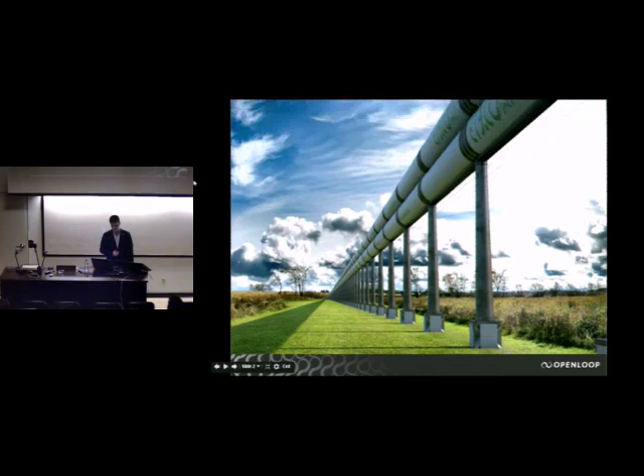Imagine a world where you can travel from across the province, from Cornwall to St. John's, in about half an hour or so, a world where you have tubes side by side, potentially by the dozen, stretching from horizon to horizon, with pods effortlessly flowing through them at almost the speed of sound and perhaps beyond. Now, this sounds really like a world of science fiction.

I mean, to travel in a tube sort of conjures up images of Futurama or Jetsons, where people traveled through pneumatic tubes. And of course, up until now, this has been a world of science fiction, a world of the impossible.

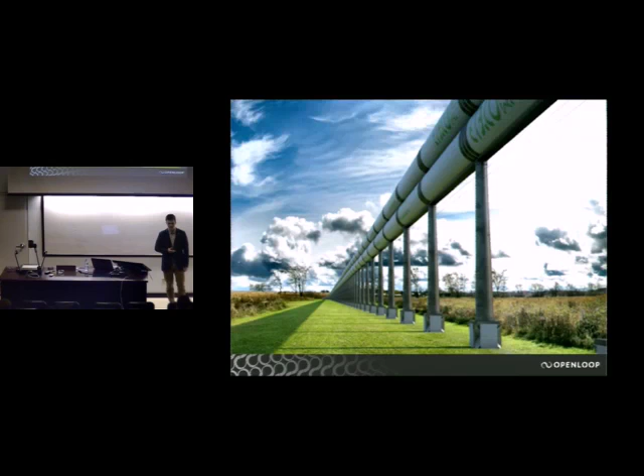One man thought of this world, and he also thought it was science fiction, but then he decided that imagination and science fiction simply wasn't a suitable label for this idea and this world. That man was named Elon Musk.

Elon Musk was born in a South African city called Pretoria on June 28, 1971. His mother was Maye Haldeman, who was a model from Saskatchewan, and his father was an electromechanical engineer who was raised in South Africa. As a child, Elon could always be found with his head buried in books, devouring information at an incredible rate.

He was a gifted child, and he was always curious and always imaginative. At the age of 12, he actually designed his own video game called Blastar. If you go searching online, you can actually find it. People have recreated Elon's game, and it's sort of a weird game.

You have to destroy some sort of enemy with a status beam, which really no one knows what that is to this day. But anyways, that's not too bad for a 12-year-old.

As he aged, Elon kept his imagination, he kept his creativity, and the dreams that a child would normally have did not die as he aged, but rather they reached actualization. They reached realization. They became reality.

Many people consider Elon Musk to be a real-life Tony Stark. He's a billionaire who's always constantly on the fringes of human technology, trying to extend what it is that people are capable of doing. Elon's grandfather, Joshua Norman Haldeman, explored Africa with his plane, and you can sort of guess that maybe Elon got his explorative nature from his grandfather.

While Elon doesn't want to explore Africa with a plane, he actually has his eyes set on something much bigger: the exploration of our solar system and the colonization of other worlds. The ultimate goal, the thing that's driving him, is the preservation of the human species.

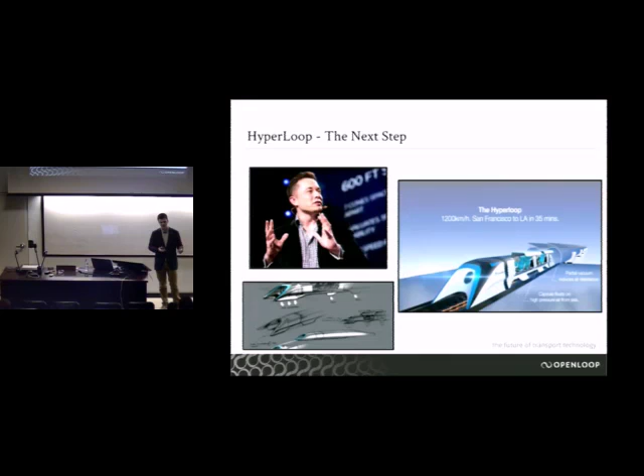This is the technology that Elon has created, and he's given it to the world, and it's up to the world to develop it and make it a reality. So we actually have the opportunity to be part of this dream that Elon has.

Now, the technology we see is in its infancy. What we're looking at is the unknown, a completely foreign thing. The world does not have this technology yet—it's beyond the fringes of what we can do. Now, this idea is in the hands of hundreds of thousands of engineers, scientists, and hobbyists all around the world to try and make this technology a reality. It's up to the world to do with it as they please.

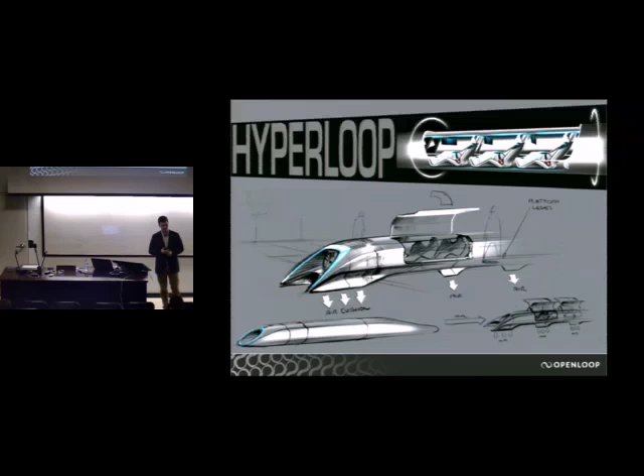Now, this technology is controversial, although many people praise it. There was much opposition to it, but at the same time, people still really like the idea. And it's going to be seen in the coming decades who has their feelings justified, whether the Hyperloop becomes a possible technology, and if it's possible, is it feasible? That's what we're going to find out in the coming years, in the coming decades.

Now, to understand the Hyperloop, we're going to approach it using an analogy, a combination of multiple technologies we're probably all already familiar with. You can dissect the Hyperloop into 3 different parts. The first is an air hockey table—most of us have seen one, I would think. The second part of the analogy is to understand the Hyperloop in terms of a Concorde jet, a supersonic jet plane that was retired, I think, a couple decades ago, but we'll still look at how the Hyperloop incorporates technology from that.

And the third analogy is, of course, looking at how the Hyperloop is similar to a railgun. Now, a railgun is probably less familiar to most people—in fact, it's actually being developed as a new weapon, but we're not interested in the chaotic aspects of the technology. We want to make it a peaceful technology, so we'll look at how the Hyperloop is similar to a railgun. Now, before we look at why you would ever want to design something like an air hockey table, you have to look at the benefits of doing that.

The answer to that question is kind of simple: it's friction. Whenever you're driving your car, the wheels are constantly interacting with the surface upon which the car travels. If you look at the green circles, these are the atoms of the wheel of the vehicle, and the blue circles are the atoms of the surface on which the vehicle travels. When you have a force or weight acting on those atoms, they become intertwined—they interlock with one another.

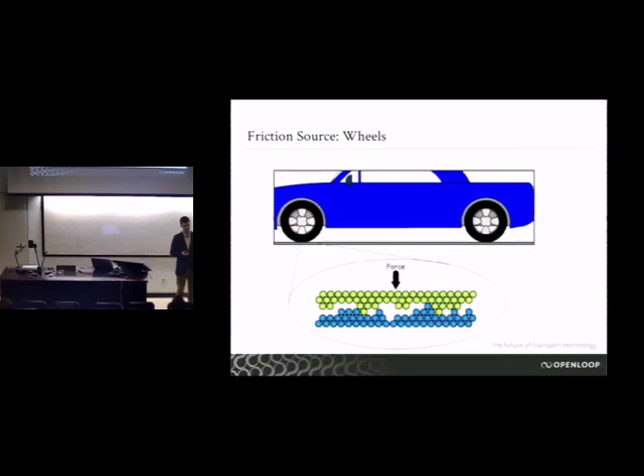It's a lot like if you took 2 layers of Velcro and stuck them together—they're made in such a way that they stick, and if you try to pull them apart, it's kind of difficult. The same thing happens with friction: the atoms intertwine with one another, and it's difficult to take them apart. This is what slows you down. The reason why you don't see me ever so slightly sliding across the room right now is because of friction, because the atoms in my feet are interlocking with the atoms of the floor.

Now, this is why we want to have something similar to air bearings in a technology. It's to minimize the impact of friction. To avoid having friction with the floor or the surface, we need to be suspended from the floor. We need to not contact the floor, and that's how we avoid friction. And this is why we incorporate air bearings.

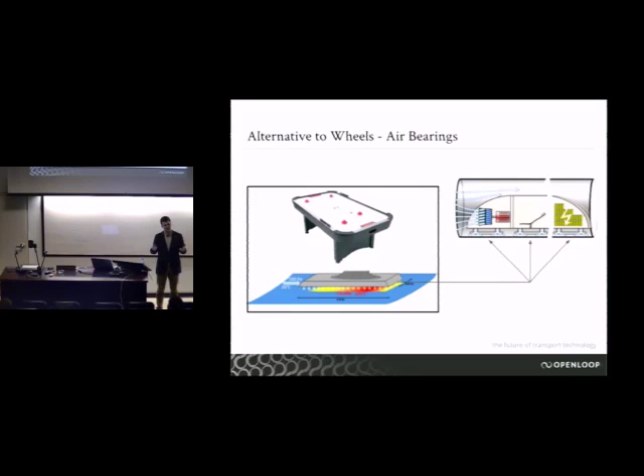The air is pressurized, and so it builds up underneath the pod, and it ultimately lifts the pod upwards. So the air bearings are responsible for creating a pocket of pressurized air underneath the pod that ultimately levitates the vehicle. This is what allows you to not contact the surface, but still be able to move freely.

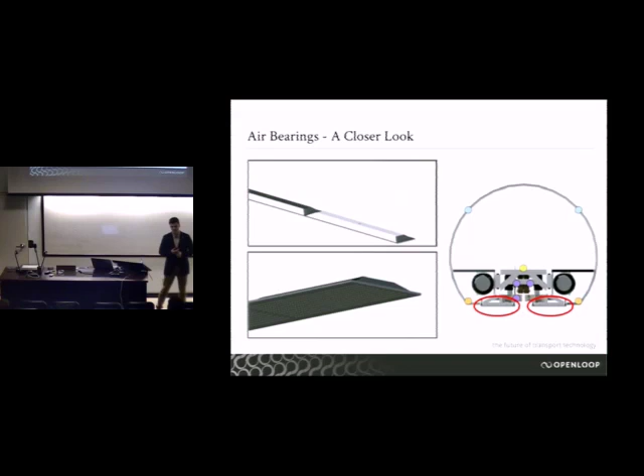Now these here are actually 3D renderings of the skates, or the air bearings, that we're actually developing right now. These are the ones we've designed, and I know that if the students at Northeastern University, which are students on our team, one of the universities we're working with, heard me constantly referring to their air skates as air hockey tables, I'm sure they would be kind of offended. But they're definitely more than just air hockey tables turned upside down.

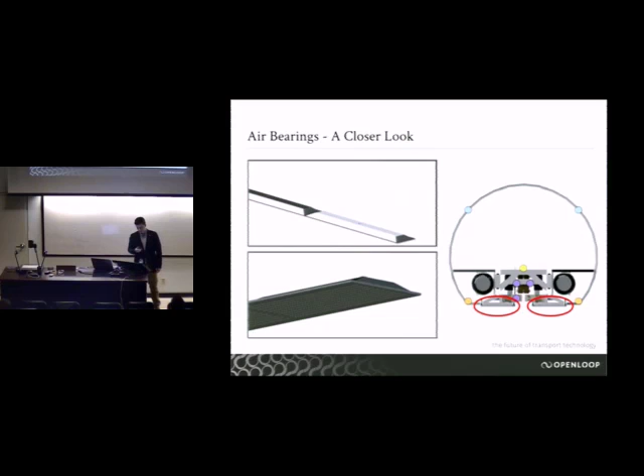Now the picture you see on the right is actually a cross-section of the pod. If you cut it widthwise, this is what you would see. You can see the things circled in red are actually the skates themselves. Those will be underneath the pod, and that's what the air comes out of to lift the pod upwards.

Now you might be wondering, how is it that we can have air that suspends what is potentially thousands of kilograms? We walk through it, and I'm breathing it right now. There's no resistance, not a problem. If you're walking outside, the wind's not too bad, unless you live in St. John's, where the air is incredibly forceful.

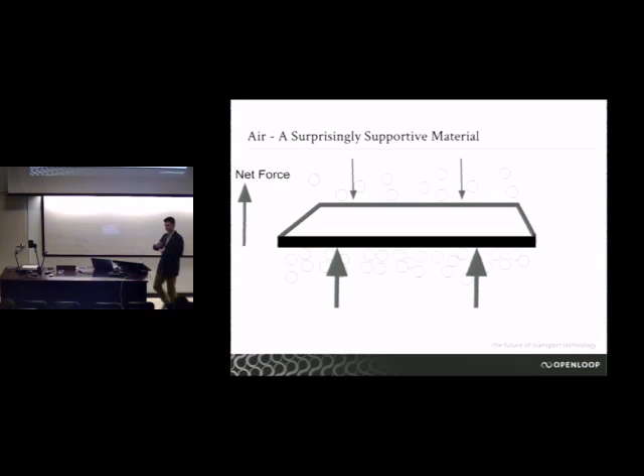What does that mean? Well, each air molecule is constantly colliding with the surface of the pod. If you have more air molecules underneath the pod, you have more air molecules constantly colliding with it. So the reason we can lift thousands of kilograms is because there's more air underneath the pod than on top. Therefore, you have more air molecules hitting it up than hitting it down, and this positive amount of air molecules pushing it upwards leads to a net force upwards, and it suspends the pod.

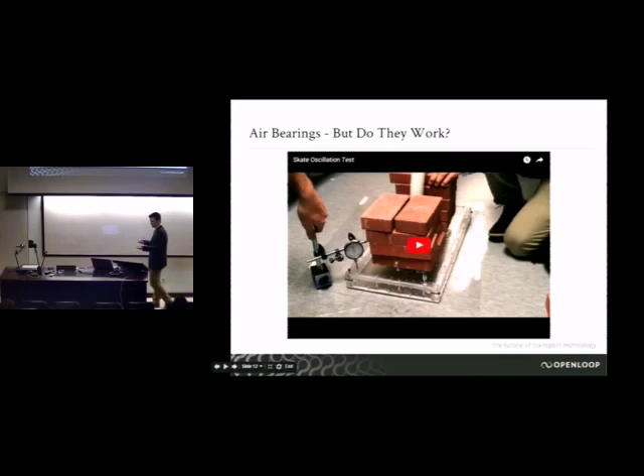And it's all great that we can have a mathematical description for how a Hyperloop can be lifted using air, but are we really sure that it works? Sure, on paper everything sounds fine, but once you put it into application and try to engineer it, it's sort of a different story. But some of the students at Northeastern University, the university responsible for developing the air skates, have evidence that proves otherwise.

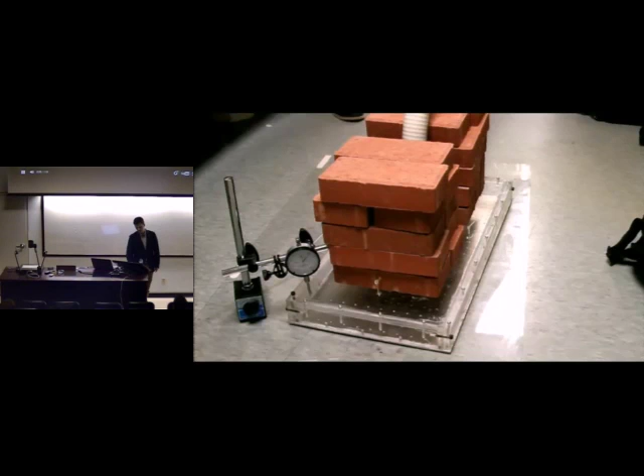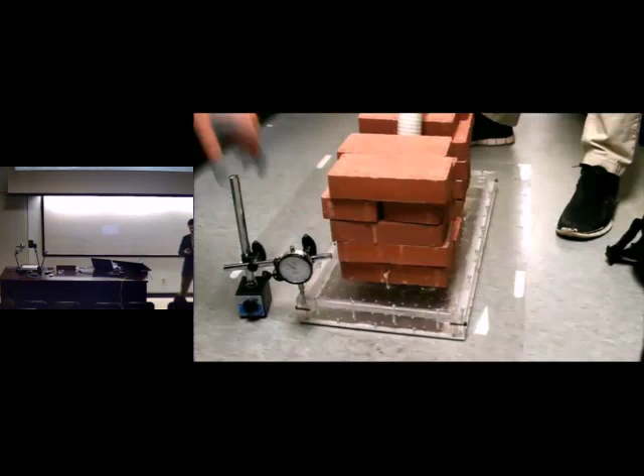The needle you see in the bottom left is actually showing the oscillations of the air skate. This thing is completely suspended, even with all these bricks on top. It's actually completely isolated and does not contact the floor on which it travels. The needle here is measuring how much the pod is moving up and down. It's moving up and down pretty quickly, oscillating with a really high frequency. So we know it works, which is good.

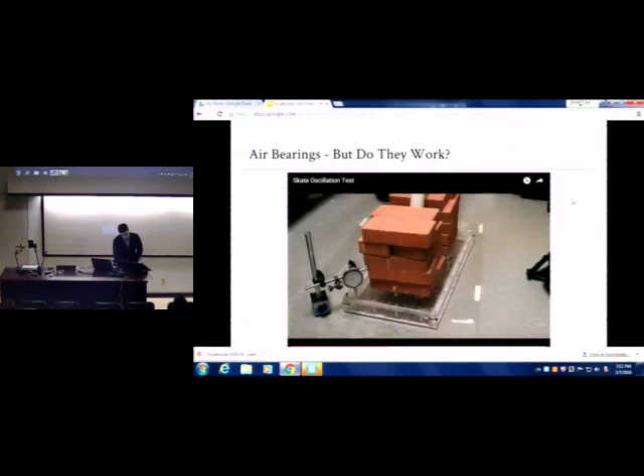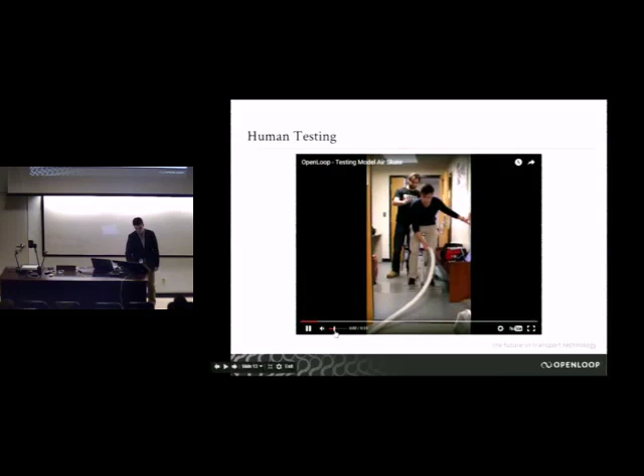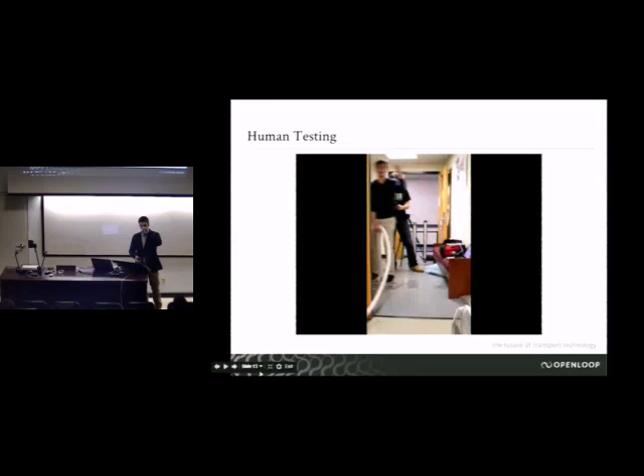So we also did another test as well. It's a little more rigorous and a little more controlled, and we've taken into account the presence of people into the pod. And this is the outcome. So we know it works. Further proof that even if you add people into the equation, it still does work. And Milan is quite happy about that.

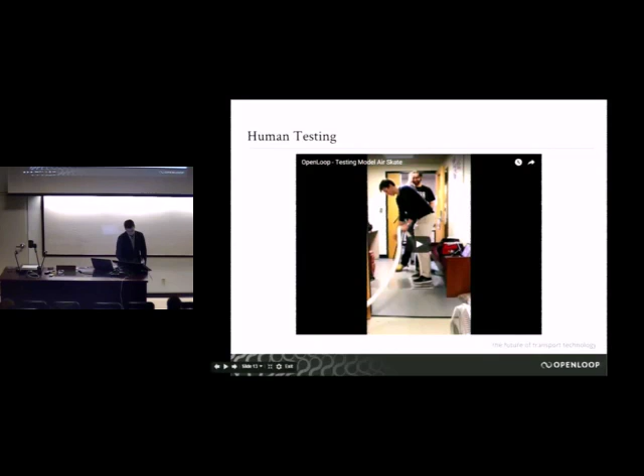So I always think that if this project doesn't work out and the HyperLoop doesn't work, there's always the possibility we can create hoverboards with this technology.

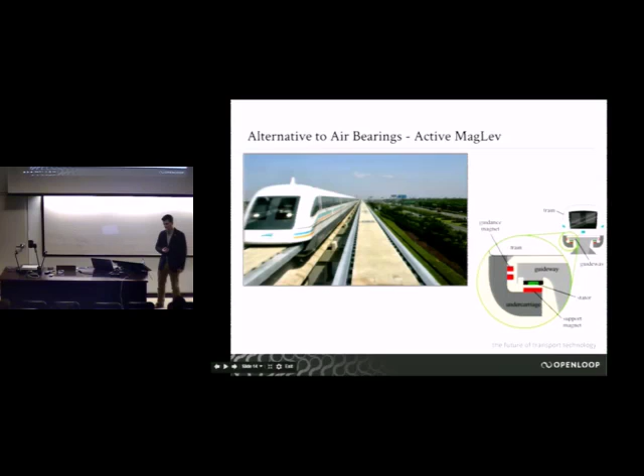So there are alternatives to air bearings as well. Air bearings are an alternative to wheels. There's also another option, that's magnetic levitation. It's no surprise that maglev has found its way into the HyperLoop, considering the fact that magnetic levitation is something we use today. In fact, the train in Shanghai uses magnetic levitation. It's suspended by using opposing magnetic fields, which lifts it upwards in sort of the same way that air bearings lift a pod upwards. We have a force that exerts the vehicle upwards. But there are, of course, disadvantages and advantages to every form of suspension, but this is also one that's also being considered with the HyperLoop.

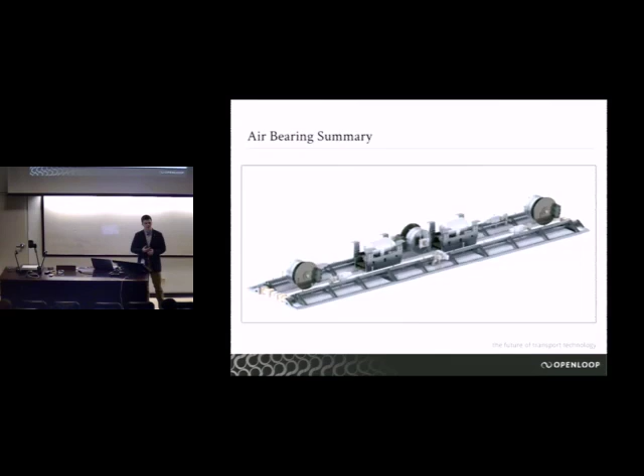Now, as a summary, we've seen that by using air bearings, which are sort of like upside-down air hockey tables, we can suspend what could be thousands of kilograms. So we have these things that the air comes out of. It forms a cushion of air which is pressurized, and it exerts a force on the object, lifting it upwards. And this is how we can maintain no contact with the surface on which we travel and go very, very fast.

Now, this brings us to the next part. The HyperLoop pod requires the usage of pressurized air, but the question is, where do we get this pressurized air from? And this sort of ties into what we're going to talk about now.

Now, the Concorde jet analogy is used for the HyperLoop, and we have to understand why we want to do that, just like how we want to understand why we want to incorporate the idea of an air hockey table into the HyperLoop. Now, there's another problem with friction, and that's the source of aerodynamic drag. If we had all of us now go out to the lobby and compacted ourselves into a nice little group, and someone tried to squeeze through this group, it's really difficult to do because there's so many people in the way. But if you space them out evenly, you can very easily navigate through the group.

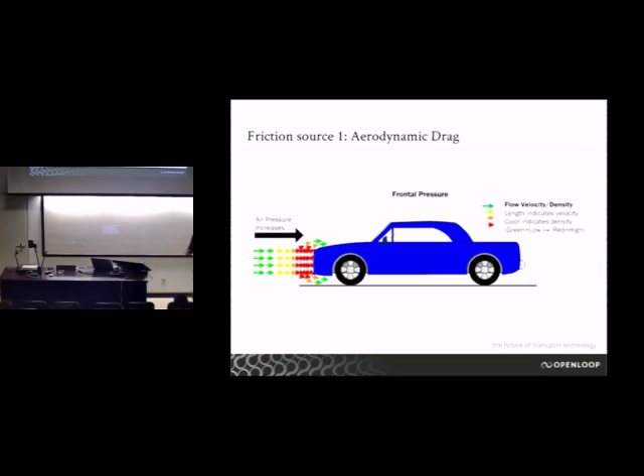This same principle applies to air. If you have air of high pressure, or a lot of air molecules in one space, it's difficult to push past it. If you have less air molecules, it's easy to push past it. This is what we can see here: the air in front of the vehicle is impeding its motion if there's a lot in front of it. Now, another aspect of aerodynamic drag is if we try to take that same sparse crowd spread out, and we try to run really fast through it, it still becomes difficult because now we have to make sure that we're really agile and not hitting anybody. So there are two main things affecting aerodynamic drag: how much air is in front of you and how fast you're going.

So how do we fix this problem? How do we overcome aerodynamic drag? Well, the solution is obvious: you remove the air. But if you do that, if you remove all the air from the world, you don't really have much of a world to live in. So to counter that, we have to create our own little world, and that's a tube. The tube is basically, you take all the air out of it, and you try to take out as much as possible. You might be thinking, though, why not just take all the air out?

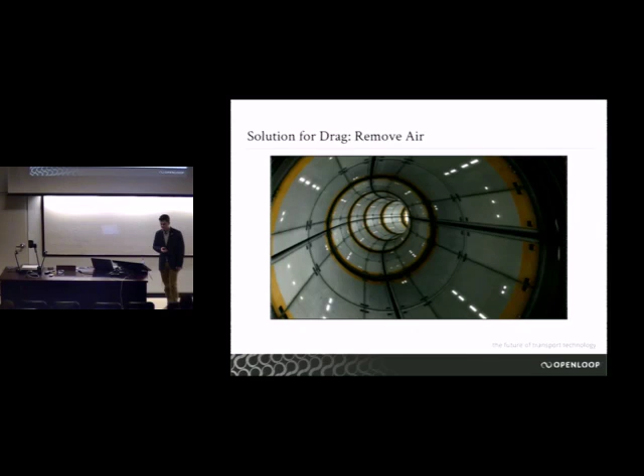But there's a problem with that as well. There's cost. If you have something that's 500 kilometers long, it's inevitable that you have leaks in there, so the air is going to find a way in anyways. So we sort of have to accept the fact that we can't have a perfect vacuum, or else we'd have to have a lot of air pumps constantly pumping out air. So we just try and get a near vacuum instead. This tube has not quite a vacuum, but close to it.

But again, there's still other problems. Even if we've taken as much air as we can out of the tube, there's still one significant problem, and it's called the Kantrowitz limit. It basically states that as you move exceedingly fast, there is a point at which the fluid is acting on you so heavily that you have to exert a lot of energy to try and get past it. You can imagine that with a syringe.

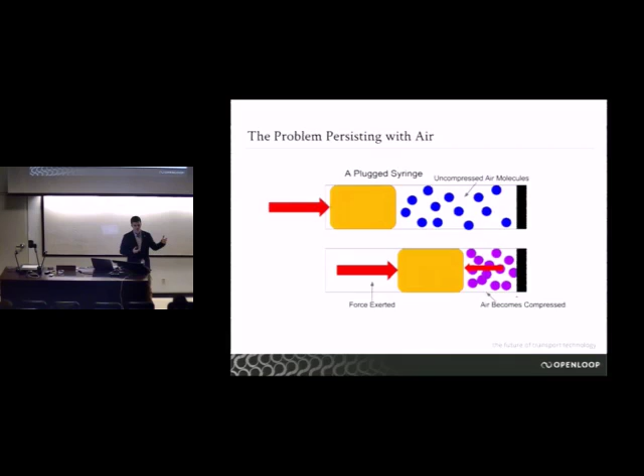If you took a syringe, plugged one end, and pushed the stopper in, at first it's really easy, but as you continue to do so, the air becomes more and more compressed, therefore more and more pressure, and this exerts an even stronger force. Eventually it becomes almost impossible to push it anymore.

Same thing applies to the Hyperloop. The faster you go, you'll eventually hit a brick wall where you can't move any faster without having to put in a lot of energy. And this is how we solve this problem: an axial compressor. If you've ever looked underneath a jet plane before and seen this exotic looking thing that's not quite a propeller, you're looking at basically a jet engine with an axial compressor.

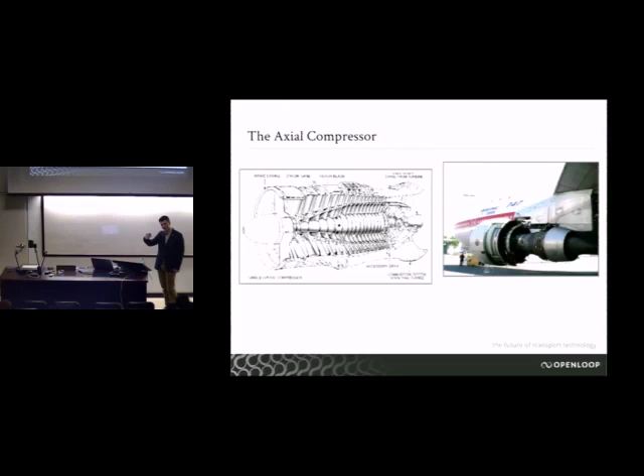Now, the axial compressor isn't the whole thing. If you look at the picture on the right, the thing on the left is actually an axial compressor. The thing on the right is the chamber where we burn fuel for thrust. So all jet planes really are just rockets, but shaped in a different way. The job of the axial compressor is to take the air in front of the plane, compress it, and then use it to inject into the fuel to burn it. The reason why people do that is so you can have more fuel efficiency and burn more fuel. But with the Hyperloop, we are not burning fuel.

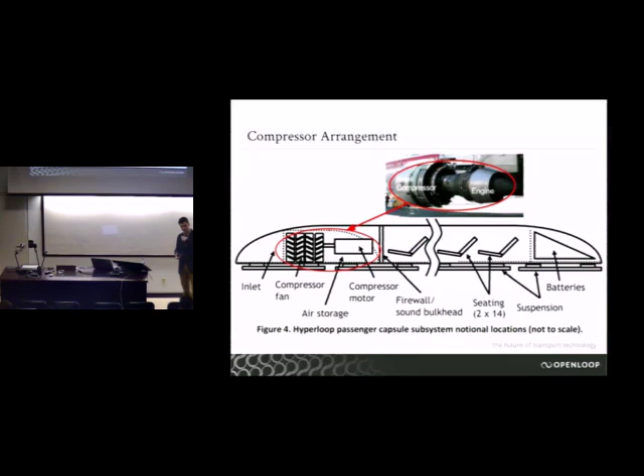In fact, we have a different application for an axial compressor. And that's to take the air in front of the pod that we've just been talking about, remove it from the front, compress it so that we can manage it, and then push it out the back. That's how we overcome the Kantrowitz limit. Now, it also turns out we can use that pressurized air to supply to the suspension, to the air bearings. So we're killing 3 birds with one piece of turbo machinery: removing the Kantrowitz limit and the problems associated with it, adding thrust to the back by taking the air from the front and pushing it out the back, and also supplying air to the air bearings for suspension. So 3 things just by incorporating this piece of technology.

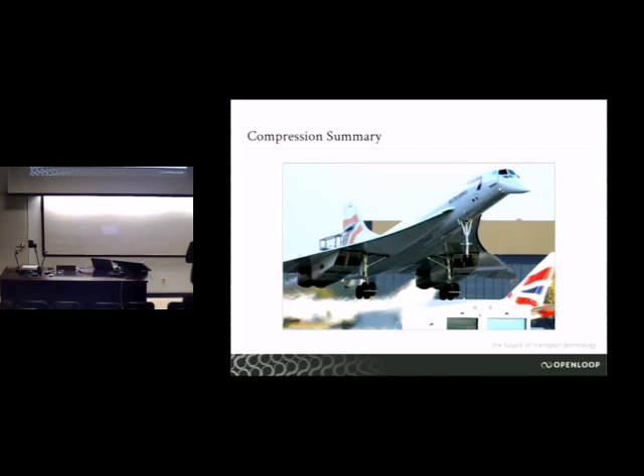So we've seen that by adding in this idea of turbo machinery that's used in airplanes, we can overcome the Kantrowitz limit. We can supply pressurized air to the air bearings so we can float. And we can also push air to the back and use it for thrust.

So the way that it works basically is that you have a projectile, which is what it's used for in this application for weapons. Basically, you have a projectile that is propelled magnetically, in a lot of the same way that if you took 2 bar magnets' north poles and put them together, they repel. We know that from experience. Now, the railgun is used in very much the same way. You have a really, really strong magnetic field that is opposing another magnetic field, and it causes a projectile to be repelled out through a barrel.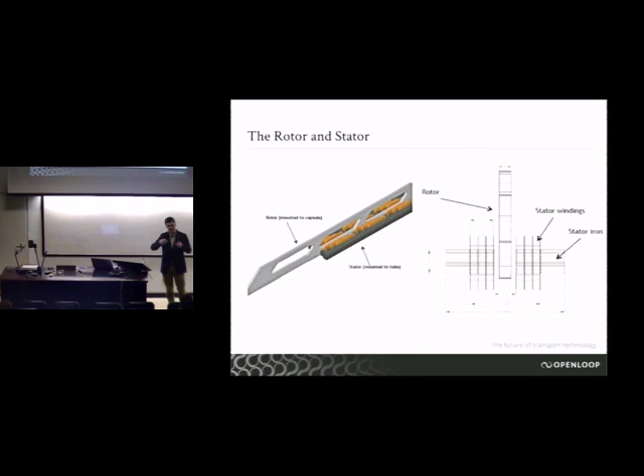That's magnetic field number 1. And we use this magnetic field to create a second magnetic field in the rotor. So every time you pass through these stators, you have these 2 opposing magnetic fields. This is what repels each other and allows the Hyperloop to be pushed, a lot in the same way that 2 bar magnets repel each other when you take their north poles together.

Now, the energy, of course—the whole HyperLoop is completely solar powered, so we don't have to get energy from burning fossil fuels. We can just put solar panels on top of the surface of the tube. We get all our energy that way. If you live in sunny California, you can get about 61 megawatts on average, and the HyperLoop only requires 21 megawatts on average, so that's pretty good.

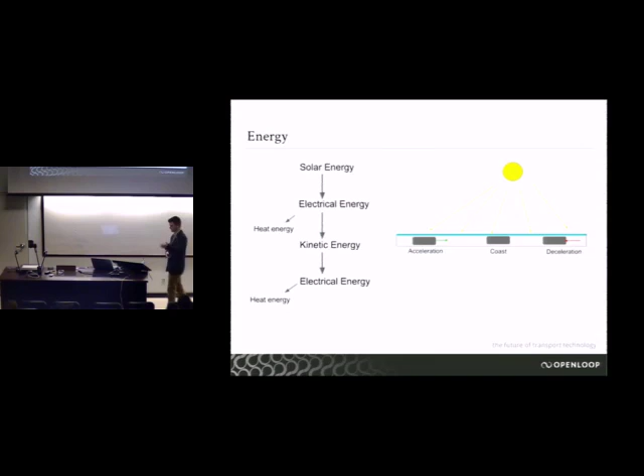Now, when we're accelerating the pod, we're using those stators and rotors, and we're using the solar energy converted to electrical energy to create the magnetic fields. Then, by accelerating the pod, we're creating kinetic energy, which converts back into electrical energy when we decelerate, so we get some of the energy back that we put into the pod initially.

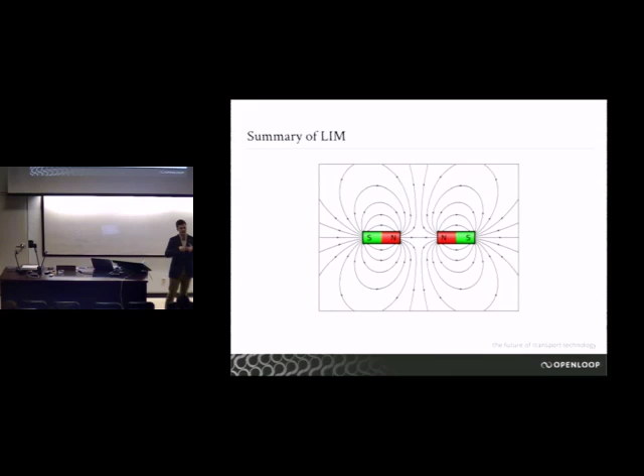Now, as we've seen, take two bar magnets, put them together north poles, and they repel. In the HyperLoop, we're replicating that with the rotor and the stator, and these ultimately repel each other. So without going into too much detail, that's fundamentally how it works.

As a summary, we've seen that we've combined multiple forms of technology, drawing on multiple ideas—the idea of an upside-down air hockey table, a railgun, or a Concorde supersonic jet. We combine it all together and we've got this interesting idea, which right now is just an idea. The design's been put forward, and the world now has access to it.

We can do with it as we want. It's up to us to do with it as we please—whether to make this technology a reality, or to simply keep it in the books of science fiction, or keep it as an idea and some blueprint gathering dust somewhere.

But maybe if we work hard enough, it will rise like other technologies did, like the airplane or the car before that. Maybe we'll revolutionize the way the world is connected just like those technologies do. Or maybe not—maybe it will stay a thing of science fiction. That's what we have to find out in the coming years, the coming decades.

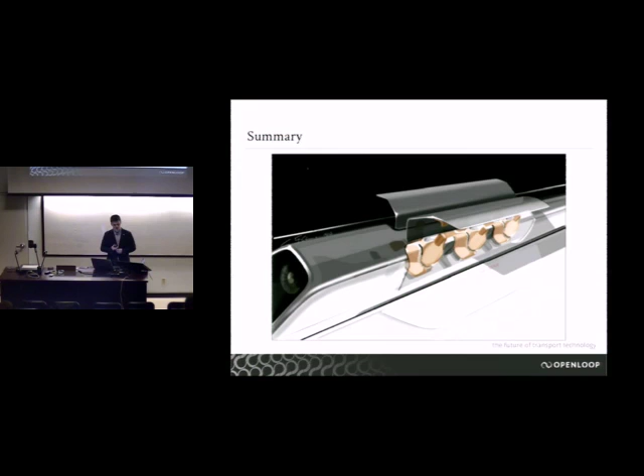But maybe it's not so far to reach. Maybe the future isn't so unattainable, that science fiction isn't so fictitious. Well, we at OpenLoop had the same thought, and I hope by the end of this night, you all will too.

And this brings us to today, to the HyperLoop pod competition that SpaceX is hosting right now, ongoing for the past 9 months. Ever since July of 2015, hundreds, or thousands of students really, hundreds of teams—700 teams—signed up and answered the call that Elon Musk put forward to the world, asking people to take this idea and turn it not just into another idea, but a reality, something we can use every single day.

Now, we at OpenLoop are, like I said, a single group of those explorers, of all the explorers in the world, and we're looking to make this technology a reality. We're looking to contribute an incremental step in the process of innovation, to perhaps give the world a means to begin developing this technology. That's ultimately our job, and that's ultimately our dream. Now I would like to show you exactly what OpenLoop is.

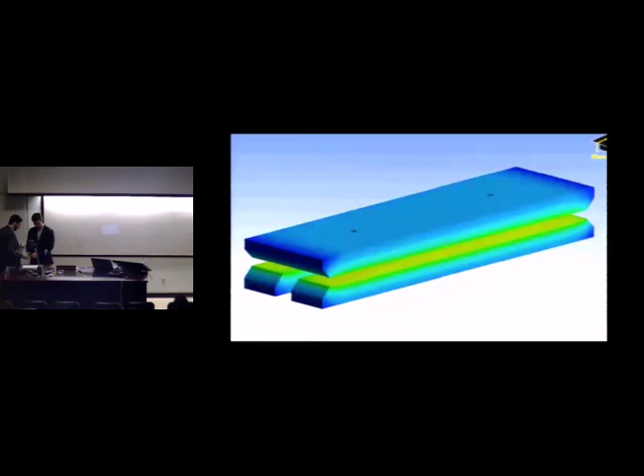Six universities, 2 countries, 1 mission: make the HyperLoop concept a reality. More than 100 students from countless academic specialties have come together to fulfill this common goal. Months of work have resulted in a robust pod design, focused on scalability and advancing the HyperLoop technology as a whole. As we enter the final phase of this competition, the time has come to build our pod. Join us. Do you feel the vibes?

So you're probably wondering at this point, what does MUN have to do with all of this? But MUN is not the only team part of OpenLoop. OpenLoop is kind of an interesting team—we're one of only a couple out of the 700 that decided to go this route.

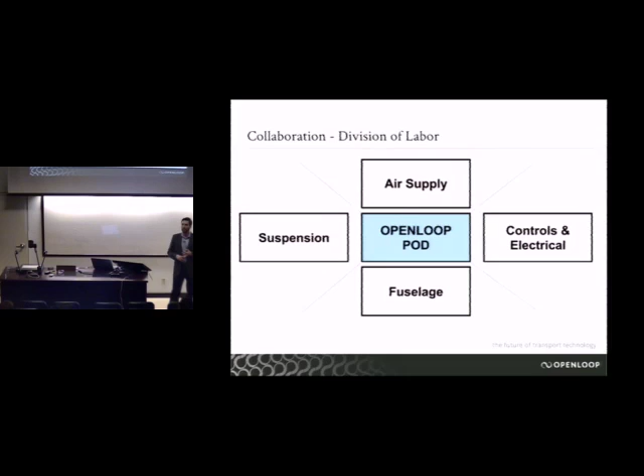This team now has split up the roles. Taking on a problem that has such a diverse background and so much technical work needs to be split up so that it's manageable. So our team basically split this into 4 main areas: air supply, which MUN is responsible for; the suspension, which Cornell and Northeastern take care of; our controls, which is Harvey Mudd; and our fuselage, taken care of by Michigan.

To date, we started in about July looking at this concept. Since then, there's been a lot of demanding deadlines. At this point in the project, we've actually done a final design and are optimizing that design and preparing to start building, testing, and procuring materials.

So up until now, we've hit a few targets. First being the preliminary design package, where the 700 teams that originally signed up and said they'd love to be a part of this submitted a top-level design package. Of that 700, I'd say about half of those teams actually made it through.

At that point, we worked even harder to make sure that by January we had a final design package we were confident in, because at that point they selected who would actually be going to Texas to continue forth. So at this point, we had what was now 700 teams reduced to about 125.

And then we traveled to Texas. To be honest, that weekend was probably one of the coolest experiences any of us ever had. We went down there and actually met our team for the first time. At this event, there were media outlets such as Discovery Channel, BuzzFeed, and basically anyone you can imagine. Elon Musk himself actually showed up to the event.

The teams competed. The level of technical detail was amazing. Everything you saw was innovative, creative, and well done. At this event, we basically presented to a number of judges for 2 days and did a formal presentation. It was open to the public for an afternoon, where 4,000 or 5,000 people came to College Station, Texas to check this out.

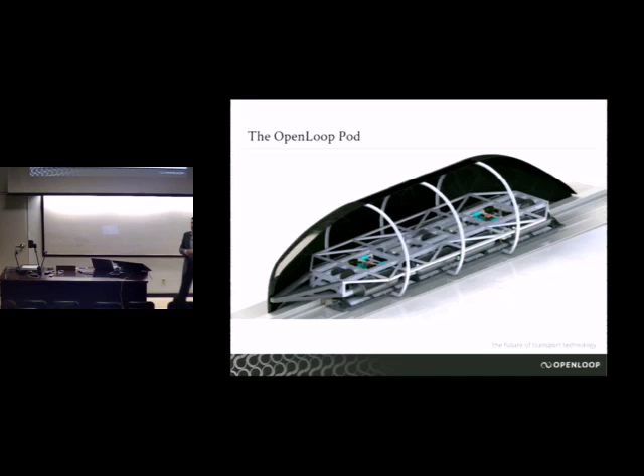So now a little bit about what we've been doing so far. On the screen right now you'll see a half-removed shell of our pod. Inside has the internal frame of our fuselage, our air supply, our skates, and our controls. Inside this system, we also have emergency braking, because when dealing with something that's not known, making sure you can control it and that it's safe is of the utmost importance.

When we look at our pod, everyone thinks this is just a prototype for a competition, something you could have in a room. But to put it in perspective, our pod is approximately 725 kilograms, 19 feet long, and about 4 feet in diameter, a little bit off circle.

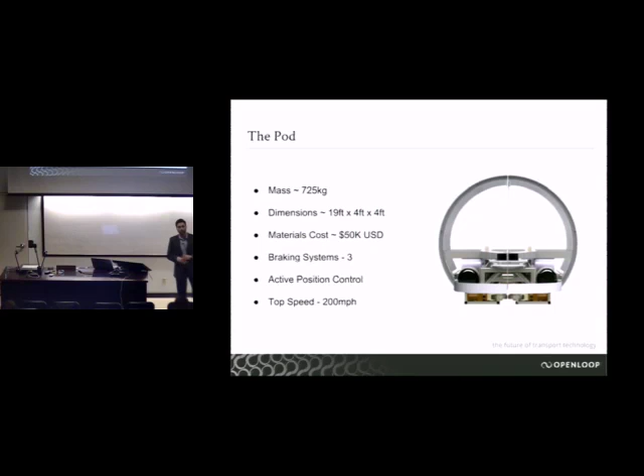When you look at this, our pod is going to cost about $50,000 US just on materials alone. To put it in perspective, some of the teams using maglev range up to $300,000 for these prototypes, which will travel up to speeds of about 200 miles an hour.

The first part of our system is the structure, making sure it's suitable for the rest of the frame to sit on. Our structure is made of 6061 aluminum and has been designed to be super robust, because any load—and ours is designed for a 2,000-pound load inside the pod for cargo, just like Andrew mentioned, since not just people are the intent of these pods.

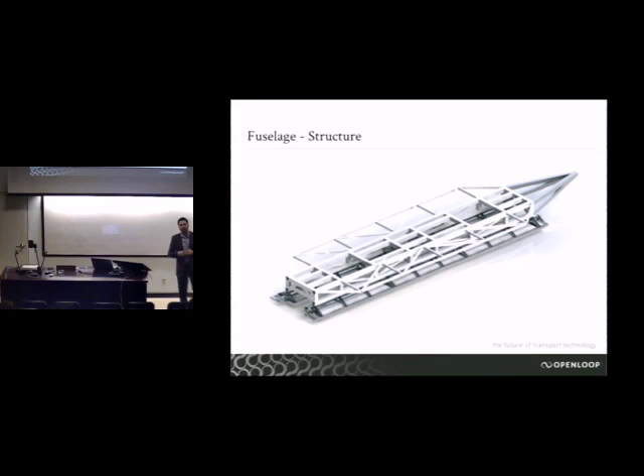It's also about revolutionizing the way we transit cargo from one spot to another, so we've looked at that approach as well. The actual deflection of our frame under that load is less than a quarter of a millimeter, to make sure we don't have any interference with our skates that are hovering above the tube.

The next part is the shell, the part that isolates what's inside the pod from the tube itself. You'll see here some CFD. What's been done down in Michigan is we've looked at different shell shapes to reduce aerodynamic drag.

Like Andrew mentioned, we want to make this as efficient as possible. Between iteration 1 and iteration 2, we changed the profile on the backside of the pod. In our last iteration, we added vortex generators. You'll see the dark blue has moved towards the bottom of the pod, representing that the flow separation has become closer to the pod, so it won't have as high of drag.

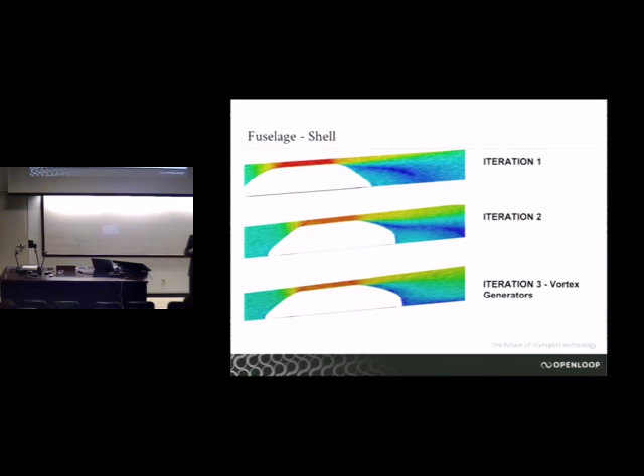The other cool part about this shell is that it's a Nomex honeycomb sandwiched between two carbon fiber layers. So what's almost 20 feet long and 4 feet in diameter is very lightweight, very robust, and it's actually a porous media, much like many low-pressure aerospace applications.

The next part, and the one that's really exciting to me, is the suspension—like Andrew mentioned, this is the air bearings and how it works. You'll see on screen two skates, each about 12 feet long, 1 foot wide, with a 1 by 1 inch grid of holes. Just like an air hockey table, there are small nozzles on the bottom that release air underneath and create this air cushion. These skates are divided into 3 different chambers.

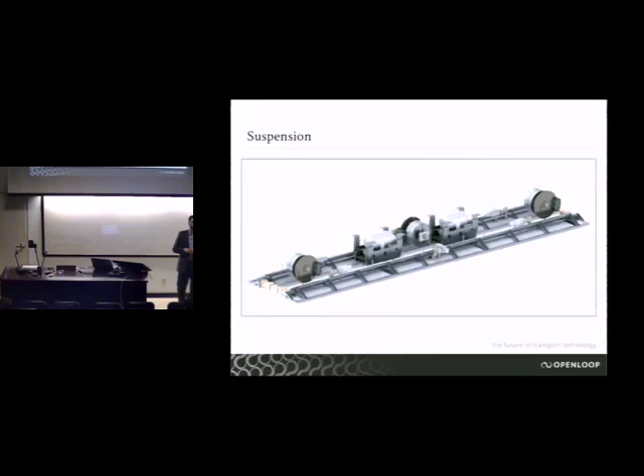Each chamber is fed air from our air supply system, which I'll talk about later. You'll also see 3 disc brakes used for controlling our wheels when we land on the track, to stop during normal conditions.

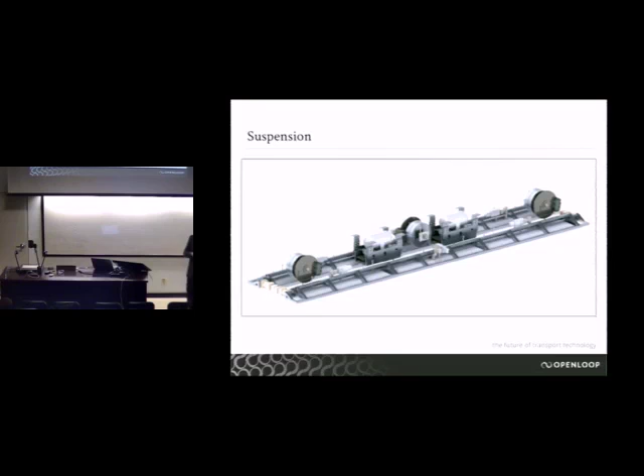Towards the middle of the pod, you'll see 2 small tanks. This is our emergency air brake supply that can automatically control and grip the track, stopping us in the case of total power failure or loss of supply in our main air system.

Probably the biggest challenge we've had with the air skates is figuring out how to model it and understand the requirements for something so unproven, given that we're traveling at super high speeds. Over the last couple of months we spent a lot of time modeling in different software and doing a lot of CFD to try to converge on our expectations.

Originally our mass flow requirements for the skates were super high and basically limited everything we could do—we couldn't find components that worked for those flow rates. So we refined that, and we've done some ultra-high fidelity CFD and come to a reasonable conclusion that we can proceed and prove that what we're doing now is actually possible.

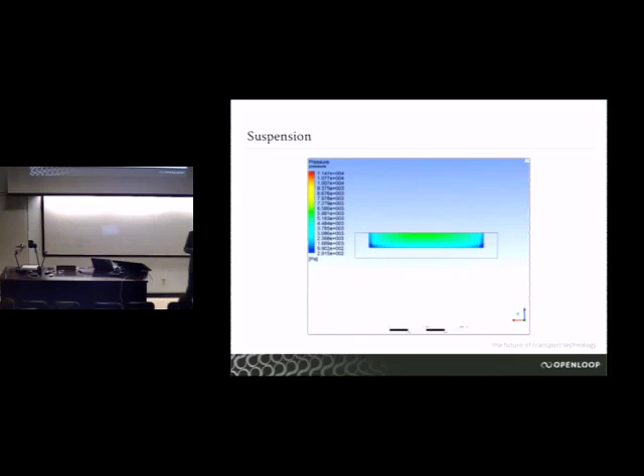That test Andrew showed you actually scales up relatively nicely to what we're looking at, considering it was under atmospheric conditions and also stationary, not moving. So that was a good proof for us.

Now something that's moving 200 miles an hour—you're not actually going to be inside for this test run. There will be a test dummy inside; we're not going to be inside pushing buttons. It's going to be autonomously controlled. Inside the system, you have an array of sensors measuring temperature, pressures, velocities, anything you can imagine, along with position control.

This is then fed into our state space control system that uses Kalman filtering, which basically makes a guess at what the position should be based on our algorithm, and then takes in the sensory information and corrects it, so it filters out noise and anomalies in the data. It then sends a signal to one of our few control points.

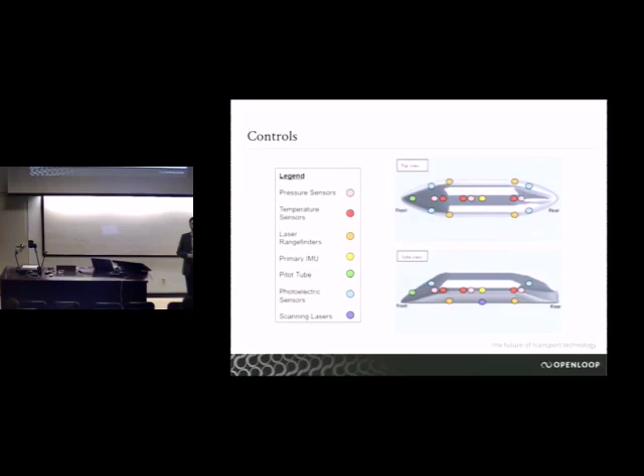So at our skates, we have controls, so we can control how much air we're letting through. We have controls at our brakes, so that we can control the brake supply and emergency brakes. And we also have lateral control, so that our pod is not going askew within the tube.

So that brings me to the air supply system. This is what MUN's been working on since last July. Initially, as Andrew mentioned, having an axial compressor is something you really want to overcome that Kantrowitz limit. At our scale, we don't face that same challenge. Actually developing an axial compressor, which we spent probably 2 months looking into, and retrofitting a jet engine, proved to not be possible once we spoke to some engineers from HyperLoop Technologies down in Texas.

They've actually said that they're designing a whole new axial compressor just for this project. So off the shelf, for the low pressure environment we have, there is not technology available that can handle this in an efficient manner. So making the choice we did, we're basically modeling now what will be the startup and finish of an actual Hyperloop pod run, because for our 1 mile test track, that's basically all you're getting anyways. That would be your actual takeoff in a real scale.

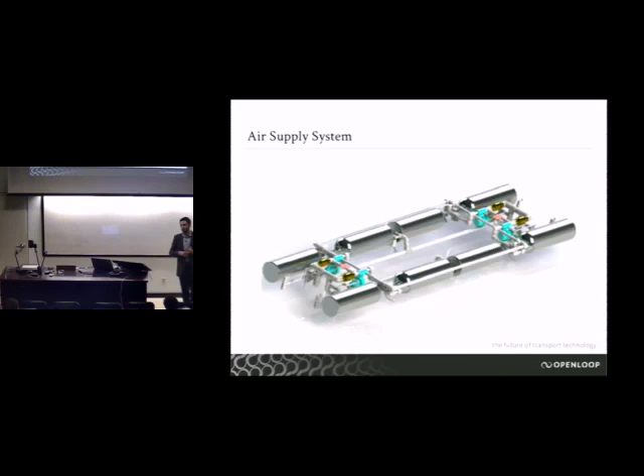So look at our system. It's basically a combination of many known components. What one might think is funny, the tanks we're using are actually scuba tanks. So anyone that scuba dives, this is legitimately the tanks we're using. We're using industrial regulators, valves, and hosing that we're actually procuring from Atlantic Canada.

So the idea here, and this is our piping instrumentation diagram, is we're basically going to have 8 tanks. They're in an array, and they're attached onto our actual frame itself. These tanks are going to store air. The air is stored at 2,000 psi. We want a much lower pressure than that.

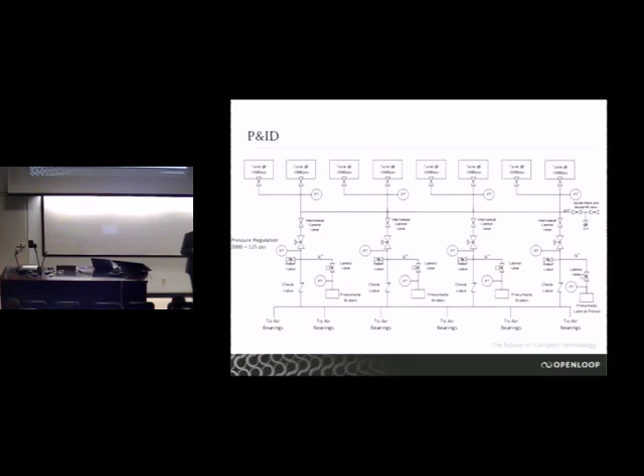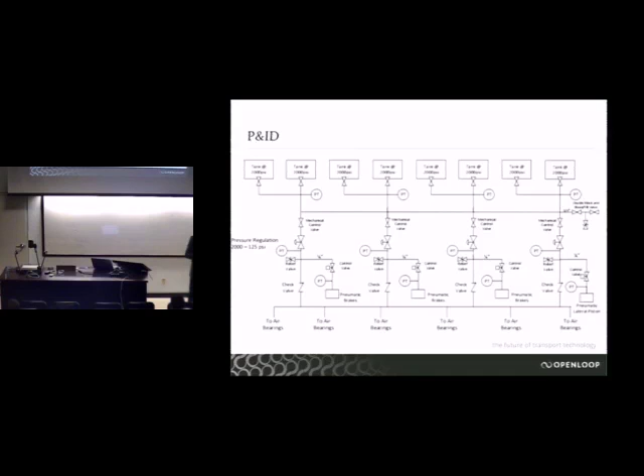So in order to do that, we down-regulate the pressure and control it to the skates. That's through the main 4 lines you'll see coming down through. Once those get down to the skates, it's at a lower pressure, and then we have proportional control valves on our skates that allow the right amount of mass flow through. Off of this main air supply system, we also have controls for our skates, and then independent systems for our emergency brakes and lateral control.

So now that I've said that, and we know a little bit about what the design is itself, we're actually at a pretty interesting point in this project, which is starting this week for us. We're looking at procuring these materials. Just last week, we submitted a revised design package to our SpaceX advisors. And now we're going to be moving on to actually procuring these materials and actually testing and building this here at MUN. Over the next 2 months, we'll be building the entire air supply system.

We'll be running function testing, pressure testing, leak testing in the tow tanks in the fluids lab, and ensuring that we have actual control of our system. Once we're done with this test, we're going to ship this down to Michigan, where we'll have the actual shell, the fuselage, and the skates. We'll integrate the whole system together, and from there the controls will be added.

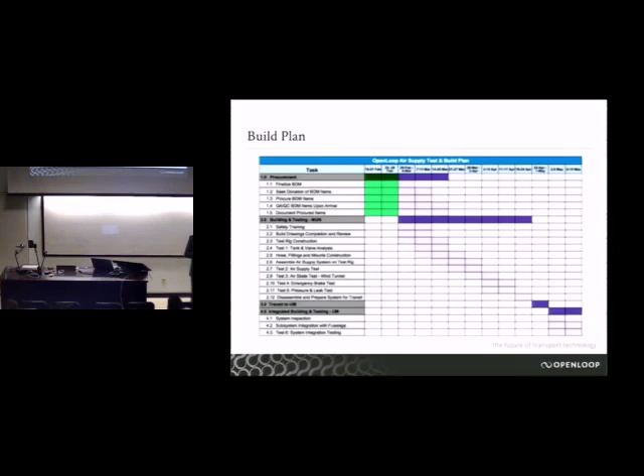And we'll look to do vacuum chamber testing and actually go ahead and have this shipped off to California for midsummer. The current competition date now is set for mid-August. So we'll be having a team pretty much down there all summer working on it. We'll meet up there again before, and there are hopefully some test runs in the actual tube itself.

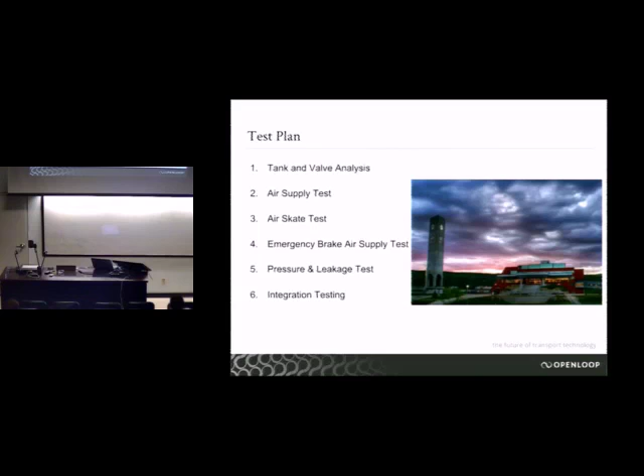So the testing that I mentioned, the first test we're planning on running is basically just a proof that we're not going to have a bottleneck in our system, that we can actually get the airflow to the skates, because that's of the utmost importance to ensure that we can get the right levitation above the tube. The next few tests are all focused on proving that we can control what's going on in the system, that we can brake safely, so that there's no leaks in the system, and so that it can hold the pressure.

The last test will be done at Michigan and Harvey Mudd, and it'll be integration testing. So at this point, we've told you about the technology, and about what we're doing here at MUN at a high level. Now we're going to give you a few pieces of information on how you can get involved or stay up to date.

The first thing is spreading the word. When we went down to Texas, there weren't a whole lot of people outside our family and friends who knew what we were doing. No one really knew what the concept was or how big this could be. Honestly, I don't think we understood either until the US Secretary of Transportation came and spoke and backed this idea. You had guys like Elon Musk fly in for an hour to talk to students in front of thousands of people. Every media outlet, every sponsor you can imagine was down there, all interested. So spreading the word is key, because the more people know, the more great ideas there will be.

This is open sourced. Elon Musk put this out here, but he's not the one in charge of it anymore. There's a company named Hyperloop Tech working on it now, but there are plenty of other opportunities, and everyone's trying to work together to share ideas. Even the teams competing are willing to help each other out. There's a group on Facebook right now with representatives from all teams sharing ideas and trying to make sure we test this positively.